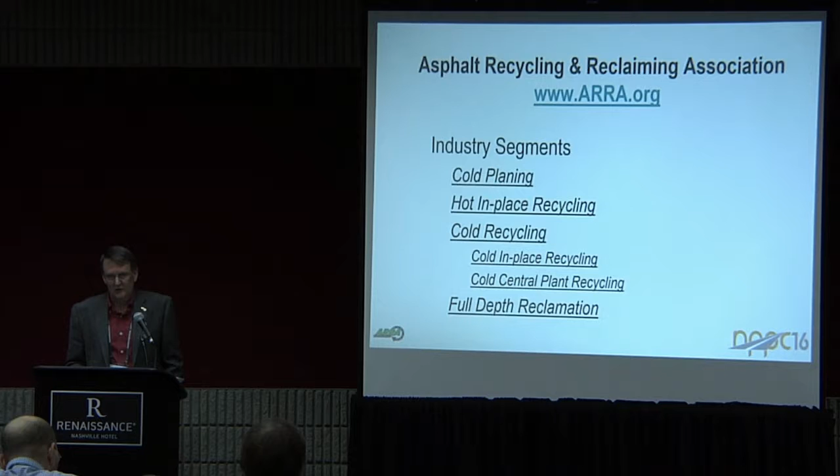We cover cold planing, hot in place recycling, two forms of cold recycling - cold in place and cold central plant - and full depth reclamation. So why are we here and where do we fit into this?

This has always been kind of interesting, where we fit into pavement preservation and where we don't. According to FHWA in a document we found, pavement preservation covers minor rehabilitation, preventative maintenance, and routine maintenance. Cold planing is used on everything, so it covers everything.

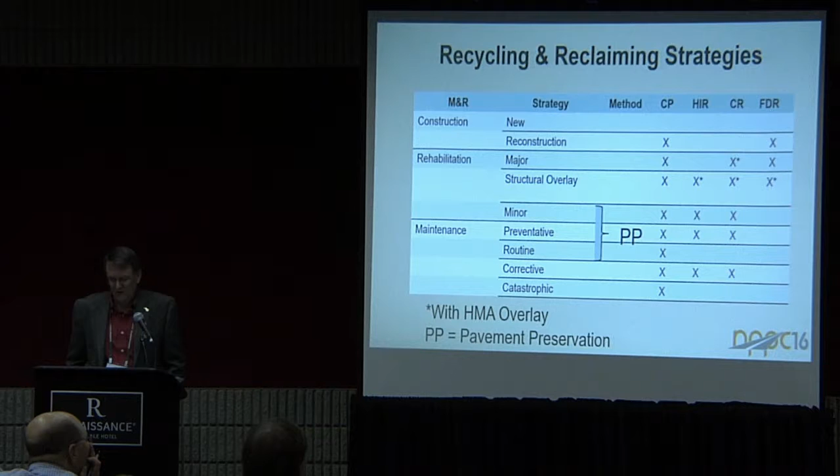Hot in place can be corrective maintenance, or it can be preventative or minor rehabilitation. You put a structural overlay on it, you put a decent overlay, you're out of pavement preservation into another genre, I guess is the word to say. Cold recycling kind of falls into the same thing. And full depth reclamation - no, that's not a preservation technique.

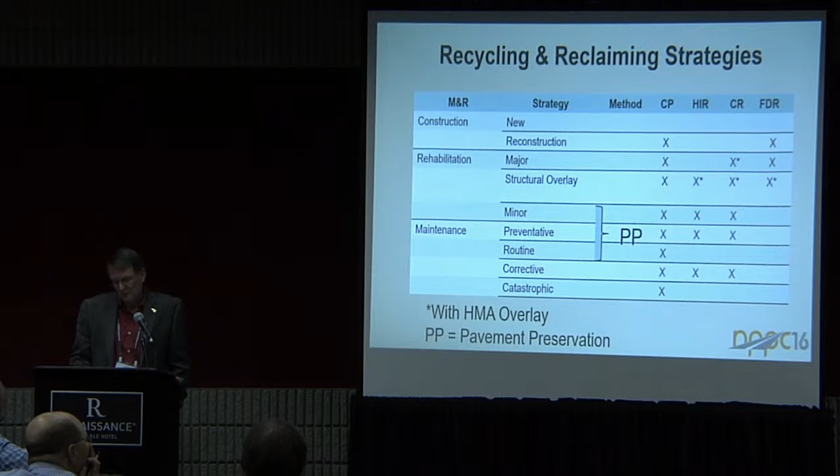John told you that with hot in place recycling, the depth is 1 to 2 inches. So when people ask me about project selection, keep in mind with hot in place, I'm going down 1 to 2 inches - I can treat distress in the top 1 to 2 inches.

When I drop into cold recycling, the typical cold in place recycling depth is 3 to 4 inches, so I can treat the distress that's there. When I match cold in place with cold central plant, we've gone down 6, 7, and 8 inches before.

And when you're at the end of the pavement's life and you're looking at rebuilding it or hauling it off, you've already paid for the material - how about some full depth reclamation to turn that thing into a stabilized base? That's one of the things I always tell people to keep in mind: it's hard for us to fix what we can't reach, and these processes go to different depths and reach different things.

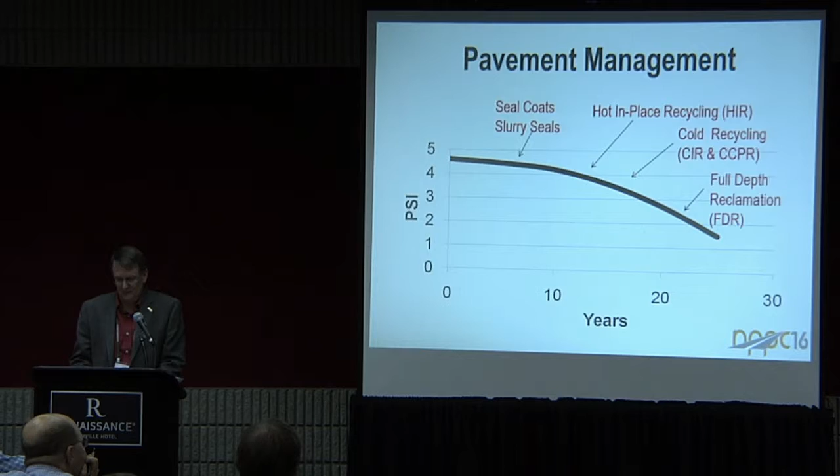I'm going to go through this quickly and get to the heart of the matter, to be sure I leave plenty of time for our last speaker. Cold planing is used a little bit on everything.

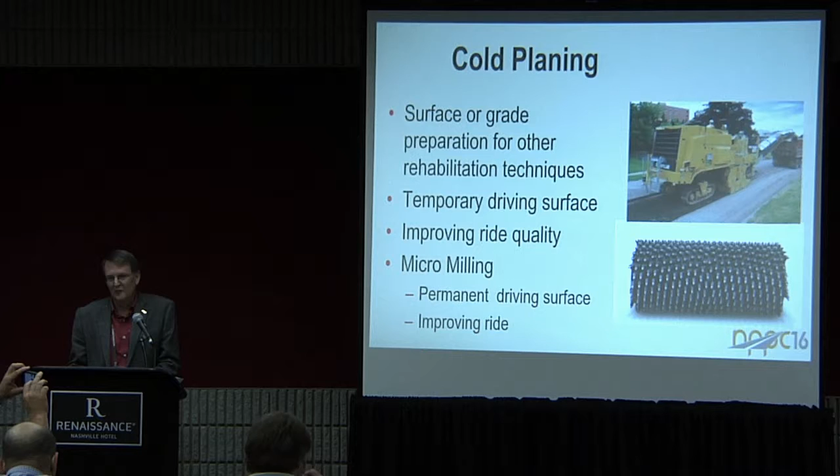Surface or grade preparation can be used as a temporary riding surface, and it's used to improve ride quality. We also go to micromilling, which is a pretty hot topic right now - you can use micromilling for a permanent driving surface or to improve the ride. There's basically just a whole lot more teeth on a micromilling drum than a regular drum.

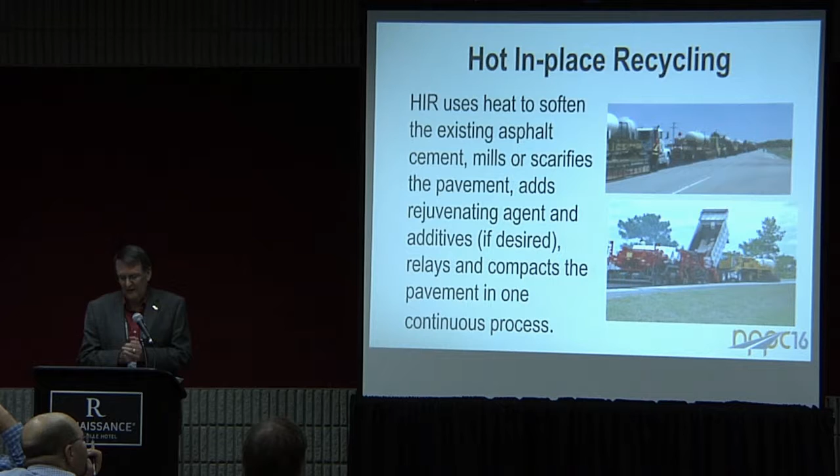Hot in place recycling - I'll give you my summary slide. We use heat to soften the existing asphalt, mill it or scarify it, add a rejuvenating agent. Some processes can add additives or add mixture if desired, and we relay and compact the pavement in one continuous process. There's surface recycling, surface remixing, and surface repaving.

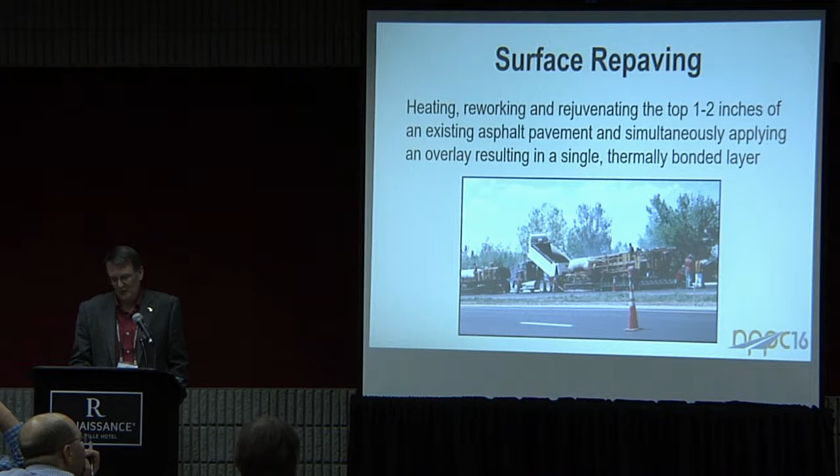Cold recycling - the one getting a tremendous amount of interest right now is cold central plant. If you missed it, Brian Diefenderfer gave a talk earlier and said the state of Virginia has enough RAP that they could pave a 12-foot wide, 6-inch deep cold central plant road from Charlottesville, Virginia to Salt Lake City. So there is a tremendous amount of RAP out there, and cold central plant recycling is a really good way to utilize this and turn it into a usable product.

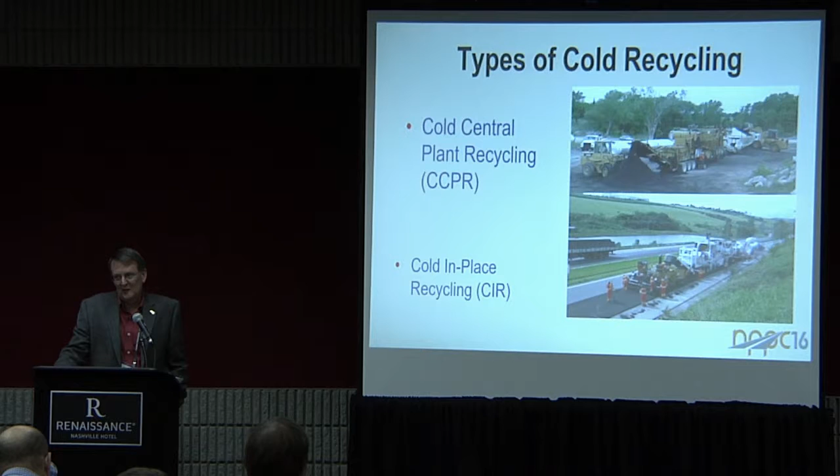And cold in place is basically the same process, except I'm getting the millings in place rather than from a central location where it's already been hauled off to.

So like I said, it's a viable alternative when you have stockpiles of high quality RAP. Now if you've got a pile that's got busted concrete and this and that in there, that's probably not what you want to use. But if you have high quality RAP, cold central plant is a very viable process.

And there are instances where you simply can't get in place recycle it. You can haul the material off to a location, recycle it, bring it back. The nice thing about it, you can use it immediately. Depending on the formulation of the emulsion you use, you can turn it into a stockpile mix.

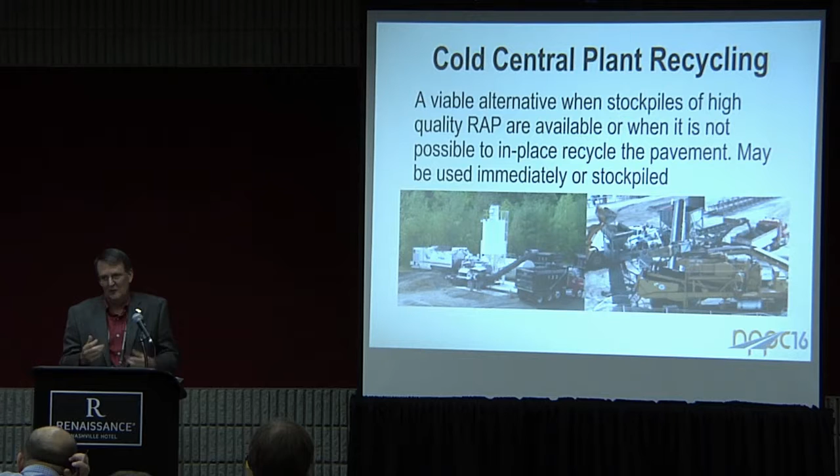In my state, Oklahoma, we built a lot of roads without shoulders, and they're getting onto us for that. So we're taking some small piles of RAP here, there, and yonder throughout the state, bringing in a unit, making a cold mix for them, and they're using it for shoulder widening on some of these low volume roads.

Cold in-place recycling. I'm going to take a distressed pavement, run a milling machine over it, and put down a recycled layer. If I've got good aggregate base down there and a shallow depth, I can take all of it.

I do want to be careful about getting into too much uncoated material. That causes problems with the mix design and emulsion dosing. If you're not real sure what's underneath there, it's not a bad idea to try to leave about 1 inch of pavement under there. That milling machine is heavy, and it's going to pull the rest of the equipment. We don't want that breaking through.

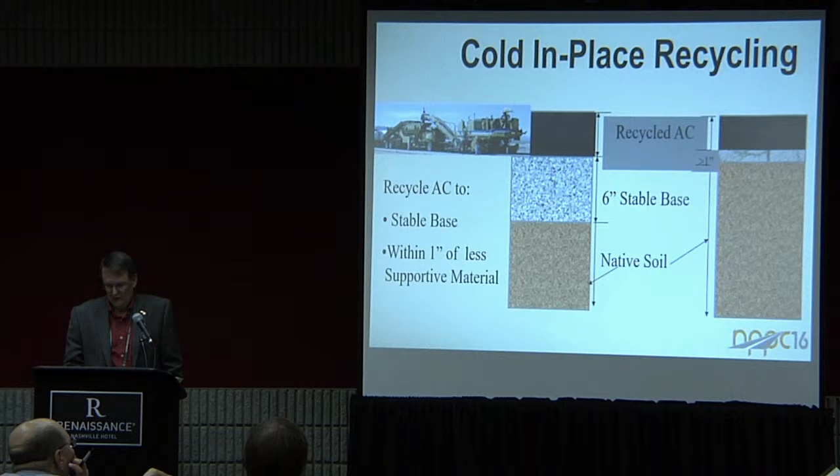Types of different trains. Up at the top, there's the more conventional train, or the full unit train. It's got a full width milling machine, pulling another trailer. It's got a screening unit, so I can screen the oversize, recrush it, drop it into a pug mill. I can add my agent based on the weight of the material, and then drop it into a paver and place it.

Down here is a single unit machine, and what we do on that one is all the mixing and the cutting is done in the cutting chamber. So in the cutting chamber, I'm going to add water for compaction, and I'm going to add my stabilizing agent. And then you can attach a screed to the back of it like this one, or you can dump it into a paver hopper, and do it either way.

And we don't see too much of the 2-unit trains anymore, but that's a milling machine and an old Midland mixed paver. We still see a few of those, but not that much. By far the most popular these days.

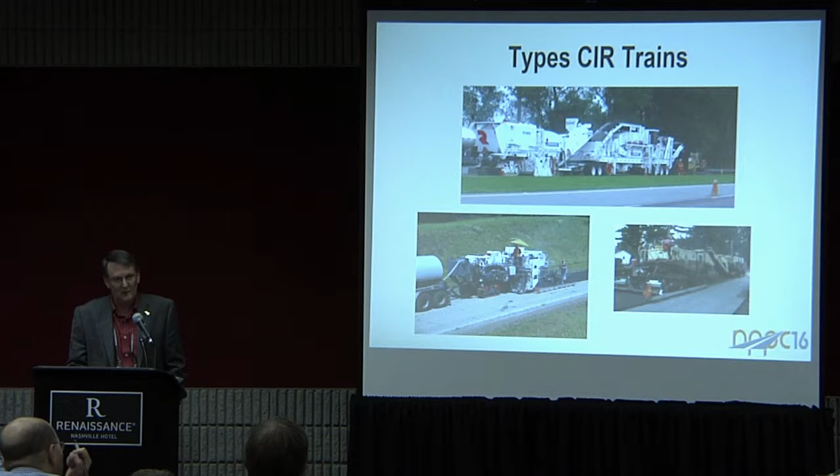The full trains are very popular out west. We see more of those. We see a lot of the single unit trains back east. They'll both do, either one will do emulsion or foam. There's sometimes a thought that one does emulsion, one does foam, but it's easy to set them up to do either one.

As far as placement and compaction, density is important on this stuff. It is a cold process, not hot mix, so I'm not going to get it compacted to hot mix voids, okay? But that doesn't seem to affect the performance. I do want as much density as I can get out of this, so I want to use heavy rollers, okay?

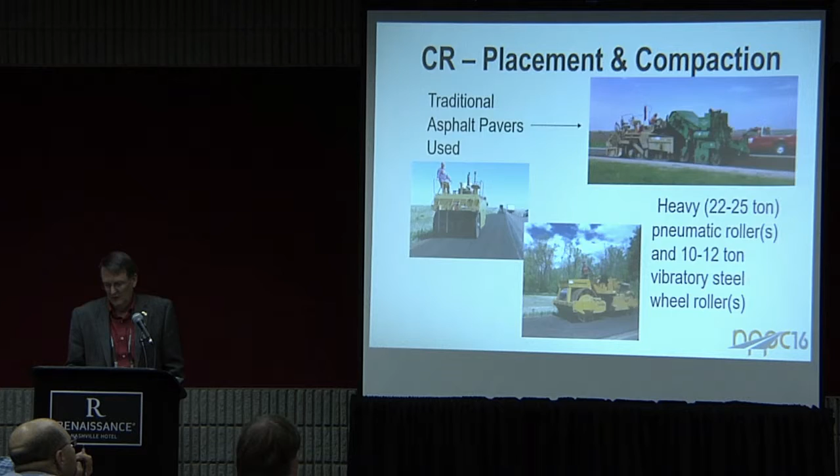Full depth reclamation, although not pavement preservation, they pay my bill too, so I'm going to come in and take a pavement that's reached the end of its life, and I'm going to stabilize it. I'm going to turn that asphalt and aggregate base and maybe some of the subgrade, and stabilize it in place, turn it into a stabilized base course that I can build a new road on.

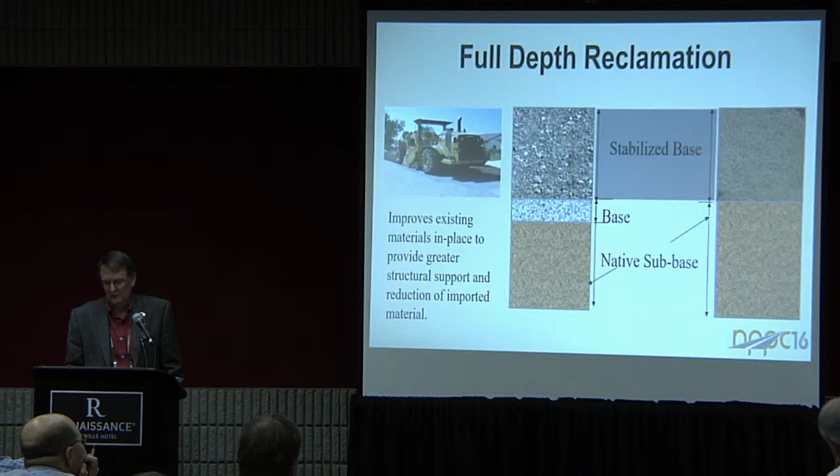With FDR, there's 4 types. We can do simple pulverization that some agencies do. If you want to do some grade control or improve it, I can add a little RAP or aggregate to it. If it's fairly clean, I can use bituminous stabilization, foam or asphalt emulsion, and there's chemical: cement, lime, or type C fly ash.

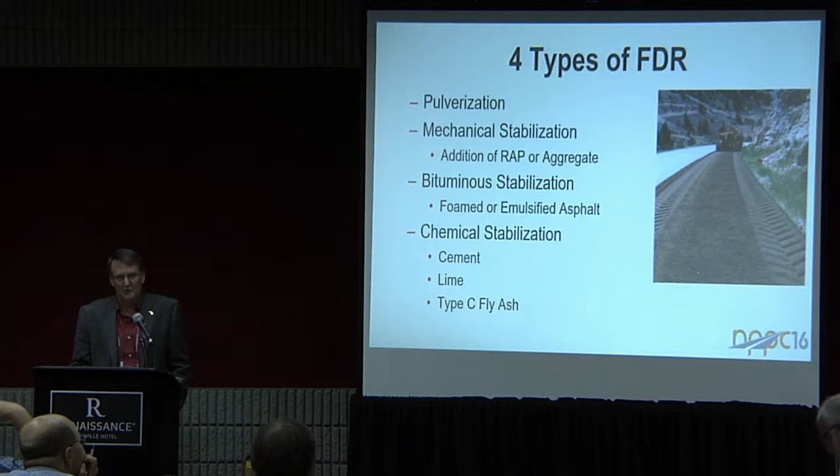Cement's by far the most popular. It works over a wide range of materials.

All right, so getting into the heart of this, we get questions as far as best practices. I hope you were able to see some of these presentations that were given earlier. Unfortunately, they were back-to-back against each other. But Dr. Chuck Schwartz talked about the NCHRP 9-51 project for trying to determine the material properties that you would use in the mechanistic design procedure.

Bottom line out of that, these things perform quite well. They tend to perform like an aggregate base, asphalt base mix. Okay, they're not quite hot mix, but when you look at the thicker section you get, they behave very similarly.

In Virginia on I-81, Brian Diefenderfer talked about that. I'll look at the presentation he did, but they put down an FDR and a cold central plant on I-81. It has 28,000 ADT and 28% trucks. It's had 10 million ESALs on it, no distress, no rutting, a tiny, tiny bit of rutting, no cracking, performing incredibly well.

VDOT put 3 test sections down on the NCAT test track that had cold central plant mix. Two of them had cold central plant with hot mix on top. The third one had a cement stabilized base under it. They've had 14 million ESALs put on them now. Maximum rutting is a quarter of an inch on one, no cracking.

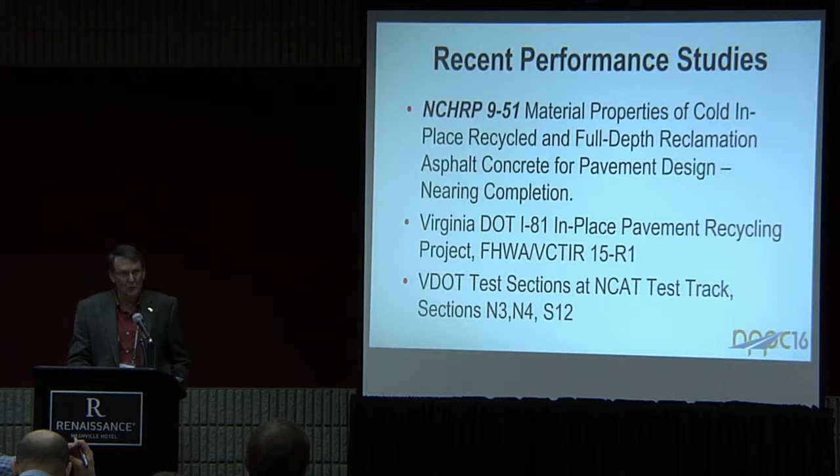Okay, these things done correctly will perform. And if, like I said, if they'll perform on these high volume roads, they ought to perform on some of your lower volume roads. So what's the key to getting a quality in-place recycling project?

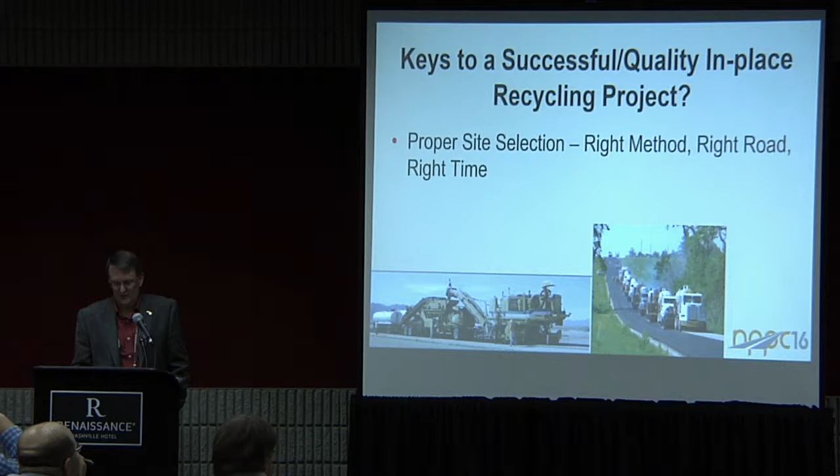It's kind of the FHWA's mantra: you've got to pick the right selection, the right method, the right road, the right time. This is not something that's the answer, it's an answer. It's a tool in your toolbox, and you really might want to take a look at using some of these if you're not. They can be very sustainable, very cost effective.

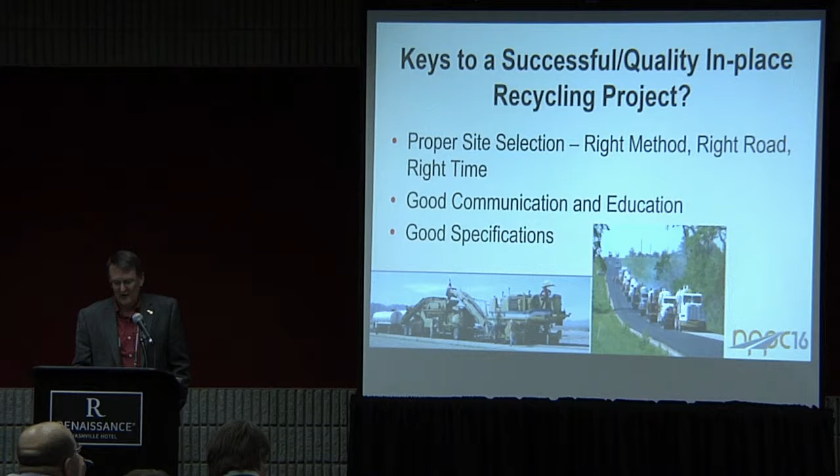One of the keys, if you're not used to doing these projects, is good communication and education. So ARRA's done quite a bit of stuff to try to help you out on that, I'll go over. And then we want good specifications, okay? And that's been a little bit of an issue, and that's what I want to talk to you about with some of the things going on with the specifications.

So ARRA developed a set of guideline specifications, what we consider state of the practice. Why we did this is at the time, most specifications in use were generated by the contractors, the material suppliers, the equipment companies, and bless their hearts, if you use them, they're going to spec their process. I don't know that I blame them, but that's an issue, and we knew that. There are all kinds of environmental conditions, and you grab a specification that works well in Southern California, it may not work well in upstate New York.

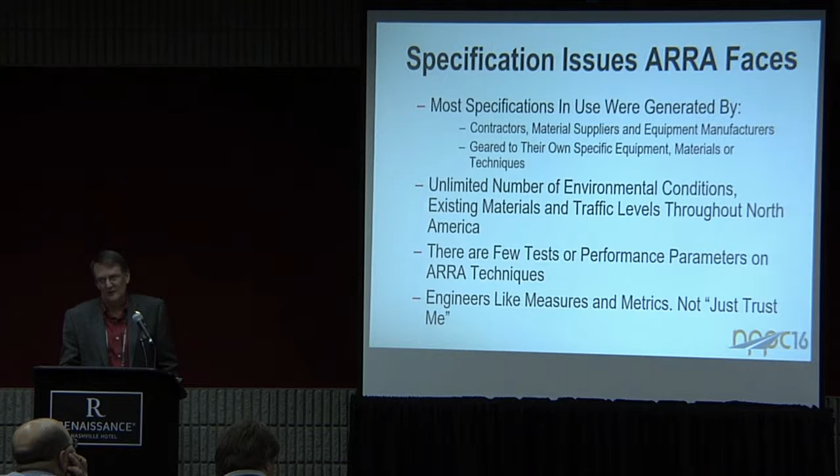Another thing that we deal with, there are few test or performance parameters on these ARRA techniques. You're dealing with material that's got to cure out, and so that's a bit of an issue as well. So what are these issues?

As John went over, there's really not that many issues as we see with the hot processes, such as hot in place. Most of the issues we see with the specifications and how do we test these things have to do with the cold processes. But all of them, hot in place included, are dealing with in-place materials. So you're probably going to see a little higher variability, okay? If you've got an issue in there, it's an in-place recycling process, okay?

One big deal about the cold processes that we don't see with the hot is these are all time dependent. If I'm using emulsions, it's going to take a while for them to cure out and get their full strength. Foam will cure out a little quicker, but it takes a little while too. We have that problem with cementitious.

Everybody knows if I'm using cement, putting cement in there, I can't grab a field sample, take it back to the lab, and 2 days later compact it. But I've seen people try to do that with foam and emulsion. It does not work. The other thing is the cold processes all have water to help with compaction.

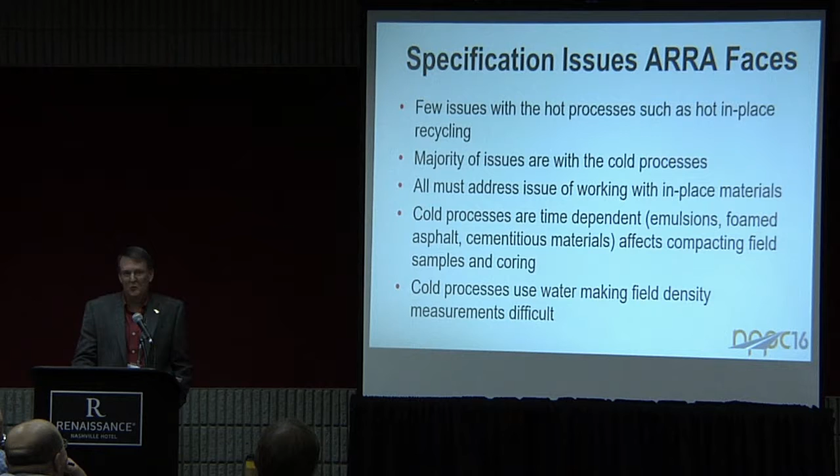And if I get out there with a nuclear gauge, I'm reading hydrogen, I'm sorry. There's hydrogen in the old RAP, there's hydrogen in the new asphalt, there's hydrogen in the water. You're not going to get a dry density, okay? You're going to have to work off of a wet density. We don't have this process and problem with the hot because it's dry, it's hot.

So for compaction monitoring, HIR typically uses conventional HMA procedures. Okay, I compact it as a percent of GMM, no problem.

With cold in place and cold central plant, for right now, we're still recommending you set up a rolling pattern and get a target density, and you monitor that. Typically, we like to see you within plus or minus 5% of your target density, and if you're off, you've got to adjust. California has been experimenting with intelligent compaction.

This is a nice way to set up a rolling pattern. How do you know we followed it? Intelligent compaction is working well for that. We're not quite ready to go for everybody. There's a tremendous amount of data you have to deal with, and that's quite a burden on the contractor to handle all that. But it's improving rapidly, and this is something we'll be looking at.

I hear people all the time wanting to cut cores out of cold in place and FDR. Well, it can take weeks to months before you can recover a full core. I should have brought one with me, but I could show you a core from an FDR or CIR project that's 6 months old. You can't tell the difference between it and hot mix, okay? But at first, it takes a while to gain strength, so you're not going to be able to cut cores and check density in any kind of timely pattern.

For FDR, it's kind of come out of soil stabilization, where the others came down from hot mix. So FDR tends to use a field compacted proctor to monitor density, and they'll grab a field moisture content to monitor it that way.

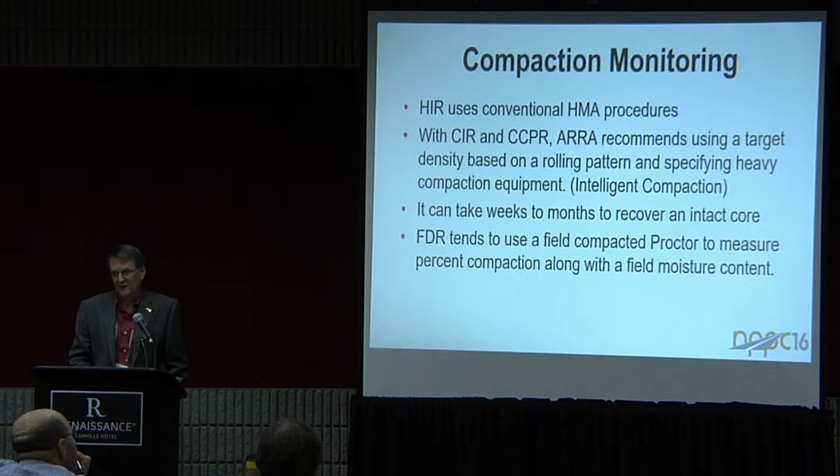Verification of field mix properties. This is same as HMA for HIR. You can still do the same thing. It's not that big a deal.

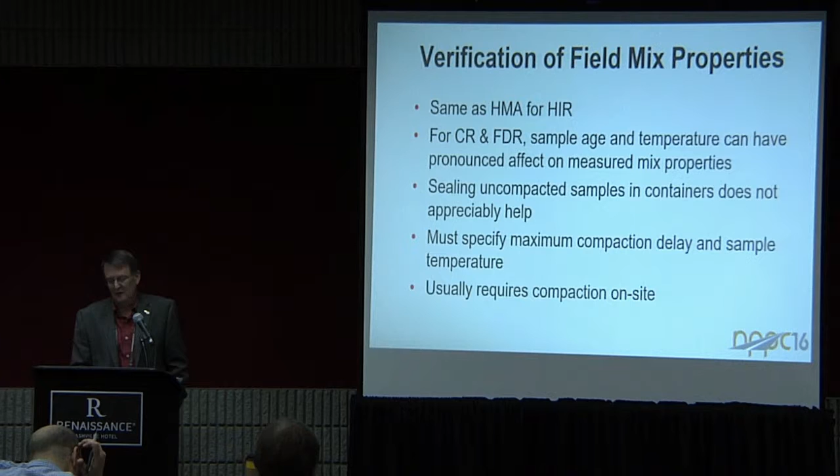For cold recycling and FDR, sample age and temperature will have a pronounced effect on your measured mix properties. Sealing uncompacted samples in containers and then taking them to the lab doesn't help, okay? If you're going to try to do this in the field, you're probably going to have to do it on site, and you're going to have to specify a compaction delay and sample temperature.

I was on a project for federal lands highways, and it was kind of an interesting one. Stuff was coming down the mountain to me. Stuff that came down in the morning, I was able to compact immediately. The stuff that they brought in the afternoon got there at 10 o'clock at night, so I sealed them. I heated them up and redid them the next day, brought them up to a reasonable temperature and compacted them.

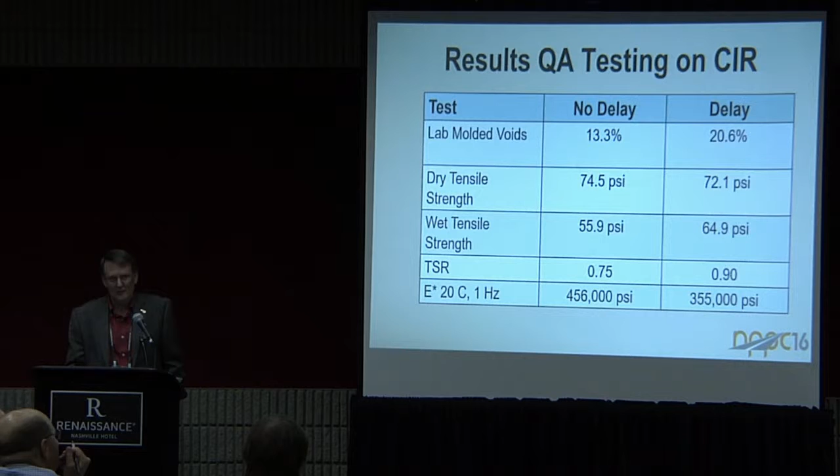There's some stuff we're working on with this. The one that I'm most excited about, this is just coming out - NCHRP Project 9-62, Quality Assurance and Specifications for In-Place Recycling using Asphalt-Based Recycling. It's anticipated, but the RFP just came out this week, so it looks like it's going to go. It's going to be a 3-year, $1 million project, and this is one of the biggest things we've ever seen in in-place recycling. We're very excited about this.

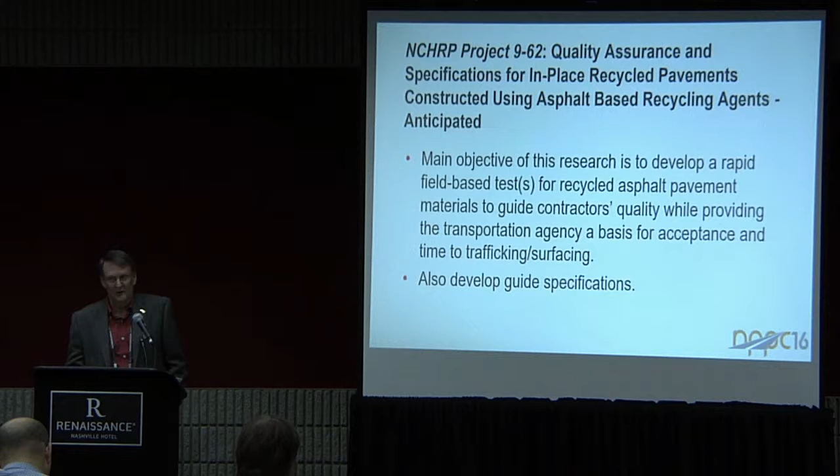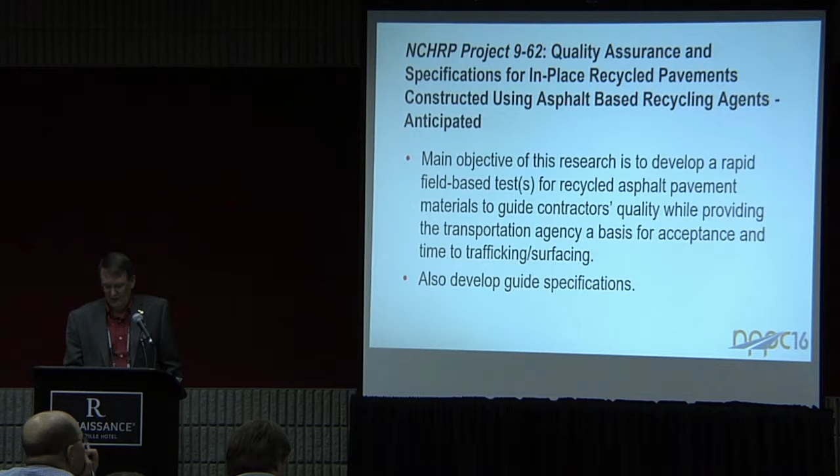What they basically want to do is see if we can come up with some type of field test that will let me know when my mix is cured enough that it's safe to open it up to traffic and when it's safe to cover it up. The other thing we hope they'll take a look at, they may not get, is some type of compaction control device, because the water in this stuff in the binder is an issue. And then they're going to develop guide specifications to go along with that.

So what are you going to do in the meantime while we're waiting for this stuff? Well, ARRA has put out their guide specifications. We have 4 series: 100, 200, 300, and 400. The 100 series we call construction best practice guidelines. They're actually written as suggested, written in specification language. We don't really expect anyone to take this and adopt it verbatim. But if you're having issues and want some ideas on specs and want to see what they recommend, it's in there.

We have the 200 series, which is project sampling and mix design guidelines. Project sampling is incredibly important. We run into issues all the time where what's down there wasn't what we thought. Ground penetrating radar works really well, but if you can't use that, we talk about how to get a good coring process to find out what's down there before you do this. And as John said, you need to do a mix design.

We're working on a Series 300, basically for our contractors, because it's quality control. If you've got a good contractor, these are the checks he ought to be making on the process to be sure he's getting good results. For project selection guidelines, we're working on a tech brief for FHWA on project selection, hopefully out early next year. And again, all of them provide user notes for more information.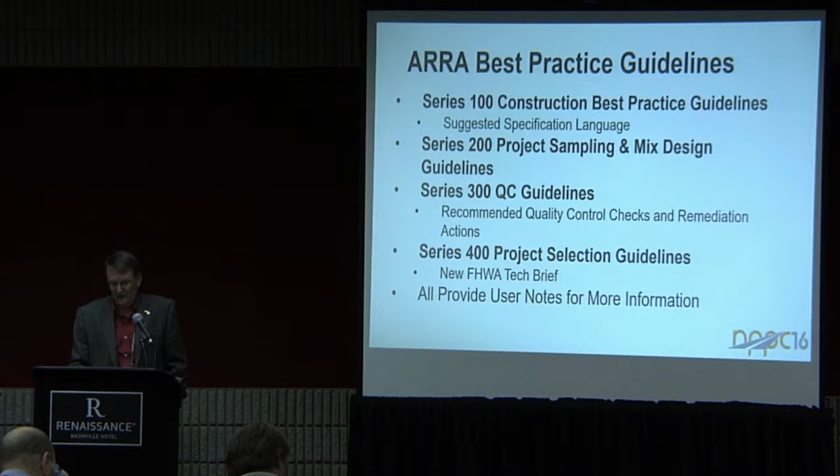As far as status, green means completed, black means not completed. We're getting real close. ARRA has a meeting next month in Auburn, and we'll finish some of these up. If you want these, give me a holler. Even if they're in draft form, if they're far enough along, I can give them to you, as long as you don't publish them for us.

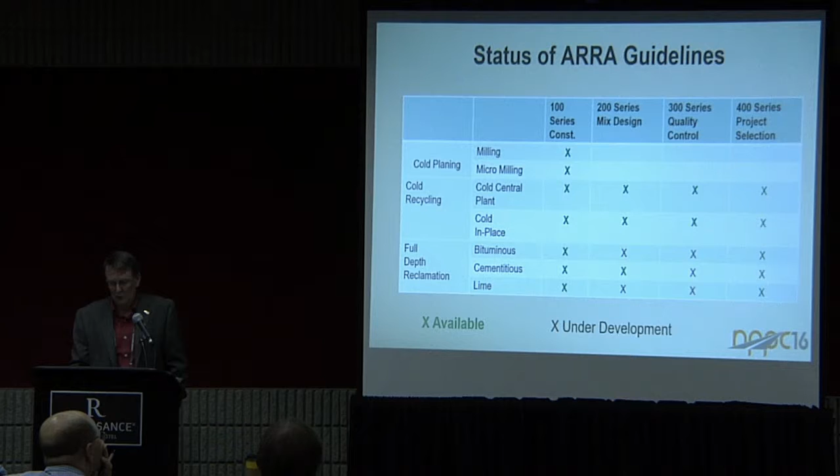Are these any good, or are they just ARRA contractors talking about, hey, here's what we want you to do?

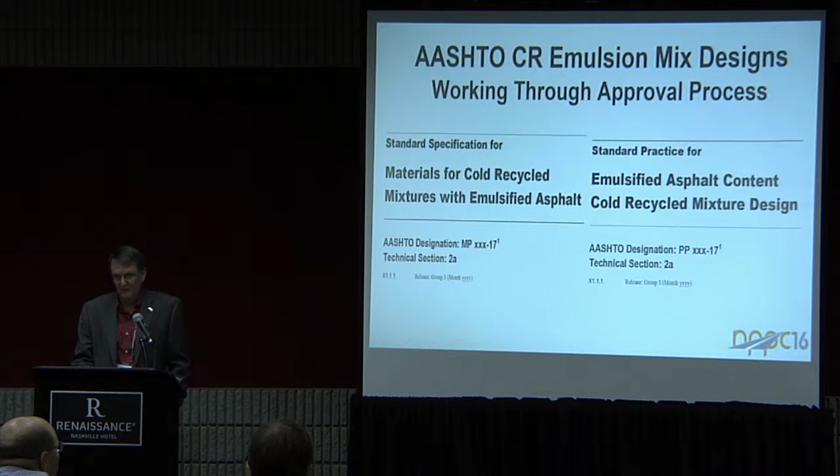Well, there is an emulsion expert task force, and we were tasked with putting out a mix design for CIR with emulsion. We took our ARRA mix design, had to reword it into AASHTO format, and it's running through AASHTO, sailing through pretty good so far. When we put these things together, they weren't just ARRA contractors - there were suppliers, some academians, and even a couple of FHWA guys looked at them. So we think for state of the practice, they're pretty good.

Where can you get these? Go to our webpage, under resources, slide down, and there's a section that says guidelines, and you can download them from there. And if you're like me, and that's one too many clicks on the computer, shoot me an email and I'll get them to you as well. My contact information will be here in just a minute.

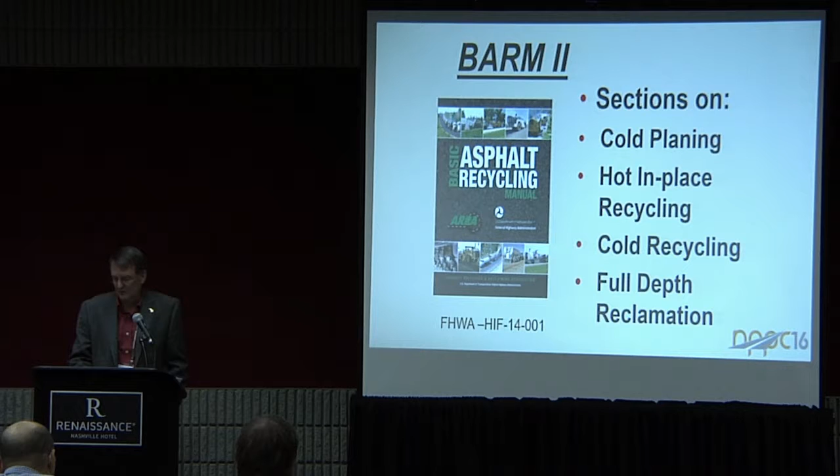The other thing we're real proud of - we put out the basic asphalt recycling manual in the early 2000s, and we just updated it last year. FHWA helped us out, and it gives general information if you're new to this and don't know much, with a lot of good background information. We cover our four disciplines: cold planing, hot in place recycling, cold recycling, and full depth reclamation. For each of these methods, we have four chapters dealing with detailed project analysis, mix design practices, construction, and project specifications and inspections.

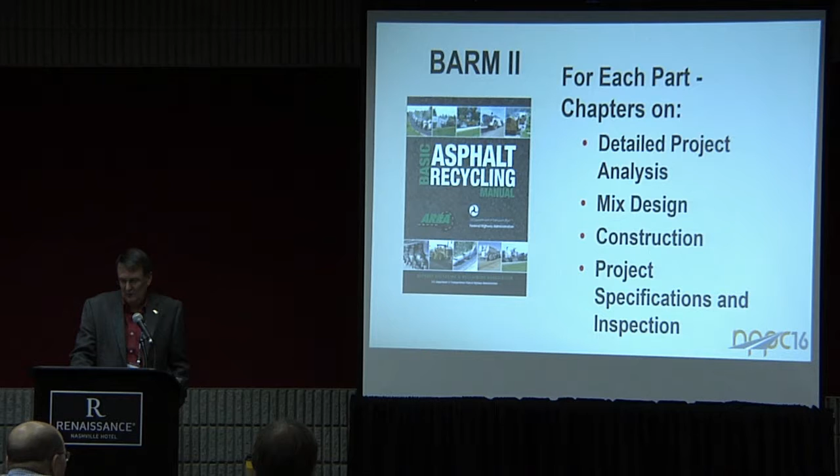Again, these are available on our webpage. You can come by our booth, get hold of me, and we can tell you how to get a copy. Some of the things in there - one thing we get hit up on, and I realize you can't see this or read it, but the whole idea is we talk about if you want to do HIR, CIR, or FDR, what distresses will it address. We have it broken down whether it'll fix it or mitigate it, because sometimes you do things just to buy time.

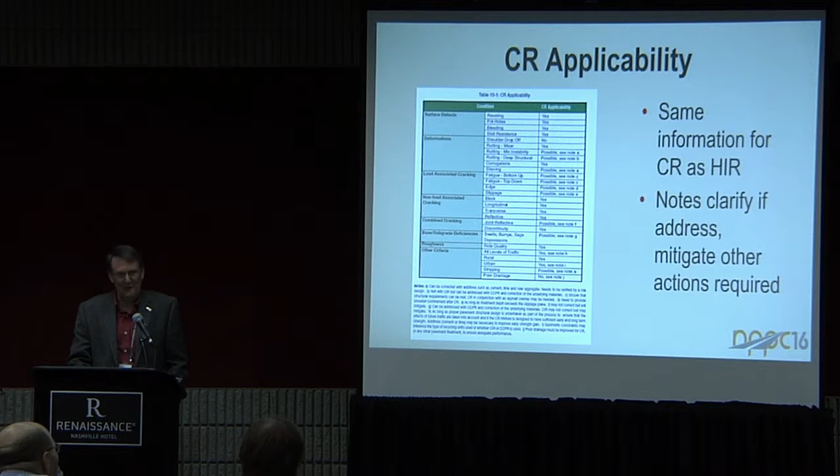So we have tables for HIR, and we have the same thing for cold recycling. It didn't take a table for FDR - you're going to reclaim the pavement, whatever the distress, unless it was a deep subgrade or drainage issue you fixed. We also address what stabilizing agent to use for FDR, so we have a recommendation. Just realize there is a lot of overlap, and it may depend upon what you use, and what contractor you have in the area and what they're used to.

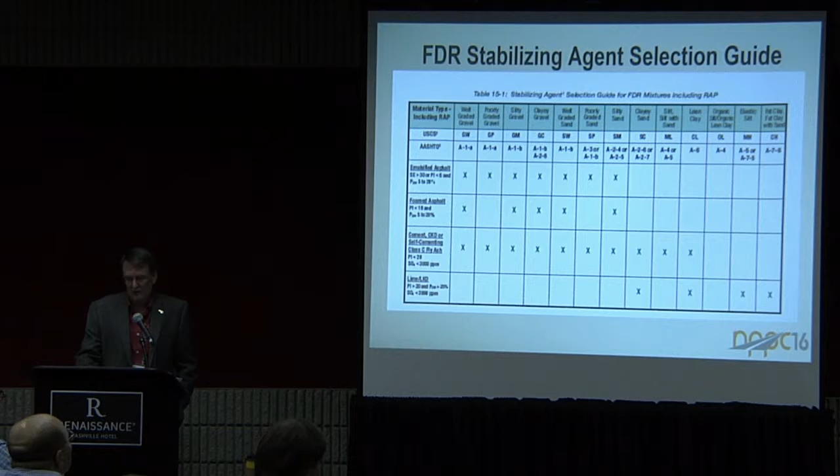As far as training, if you have people who are going to be out doing inspection on these processes and they're not familiar with it, the Transportation Curriculum Coordination Council, or TC3, we've developed three web-based courses for them on HIR, cold recycling, and FDR. These used to be hosted by NHI.

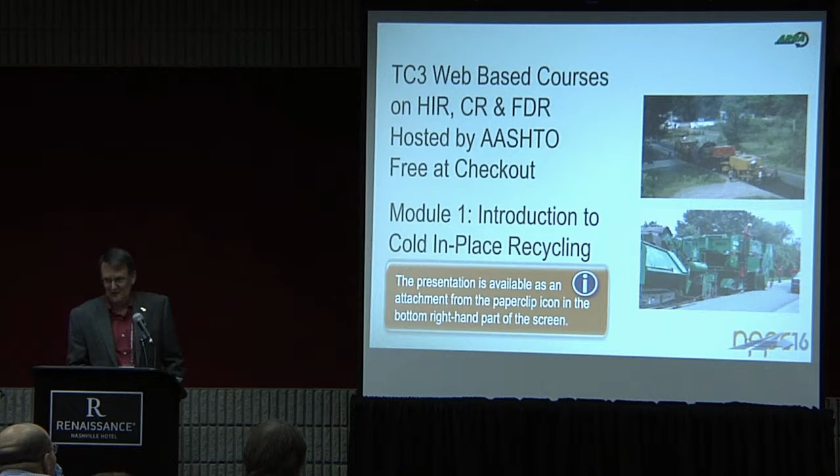They've come over to the AASHTO webpage, and I will warn you, if you go in there to download it, it looks like they're going to charge you for it. But we were able to get them to put those on for free because we developed them for them, so it should not be charged at checkout.

There are 3 of these. I realize I'm not going to be able to leave this on here long enough for you to write it down, but the presentation will be available. If you're having problems with these, contact me and I'll get them. There are 3 different web-based courses geared for inspectors for these 3 different processes: 2590, 2509, and 2593. These run anywhere from 2 to 4 hours. They wanted a lot of questions on there, so it's supposed to be like a course, but there's some pretty simple questions on there, so you don't have to worry about that.

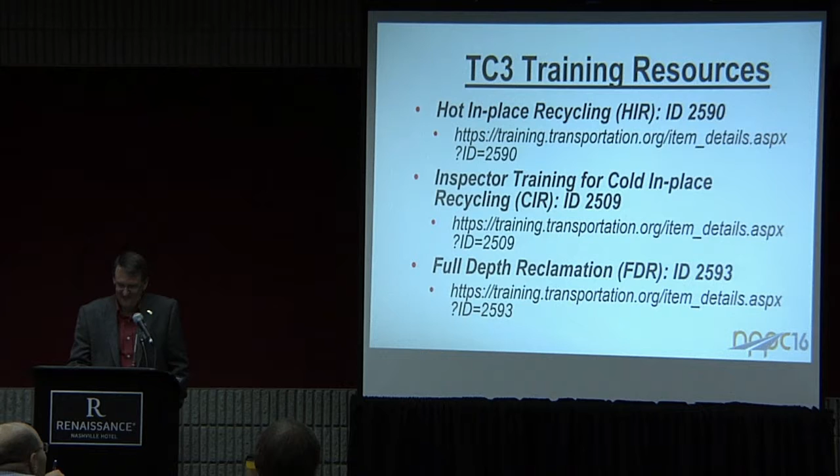Finally, a couple of other things. ARRA realizes people can't travel. If you've got a question about one of these processes, or all of these processes, let us know and we'll come out and visit you, and we'll be glad to put on a 1-day, 2-day, whatever you want training class for you. National Highway Institute has a 2-day course on in-place recycling. It's 2-day instructor-led, and there's a little bit of stuff they want you to do ahead of time so you're familiar with the process. It looks like they've done this in several places, but it's going to be done in New Mexico in the next month or 2. So if you're with an agency, I think they've got space if you wanted to send somebody to that. It's a good class.